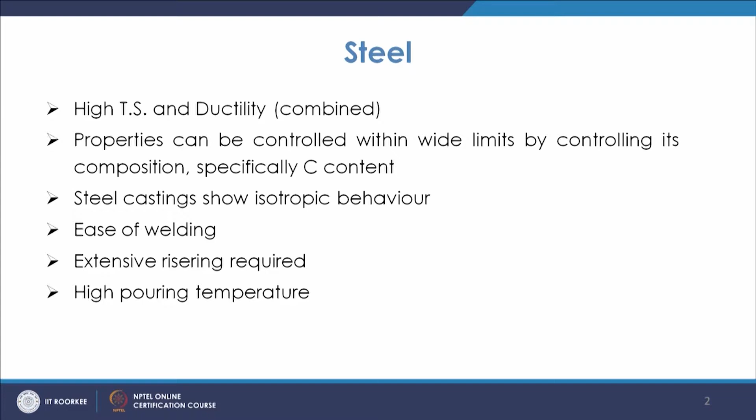Now, steel castings also show isotropic behavior, which is one of the advantages. Ease of welding: weldability is good, so it is also preferred for fabrication purposes. When you have to join two pieces, because of the ease of welding, it is preferred over many materials.

But there are certain challenges in steel casting. One is that extensive risering is required, because first of all we are going to high temperature, and also you have the freezing range involved. That freezing range necessitates the use of risering to a larger extent.

Also, whenever you have heavy sections combined with thin sections, or large chunky portions, the risering requirement has to be properly addressed, because otherwise you will have defects like hot spots or shrinkages. So, extensive risering is required in case of steel. You have to have proper understanding and control of shrinkage defects, where proper risering will address those issues.

Then we know that we have high pouring temperature in case of steel, which is also one of the challenges. For that you need a proper furnace which can give you the large pouring temperature, and the defects related to high pouring temperature need to be taken care of and properly controlled, such as gas absorption at high temperature.

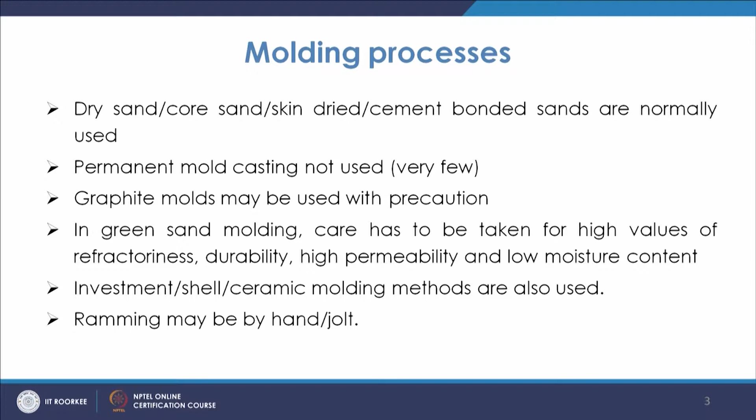Investment casting, shell casting or shell molding, then ceramic molding method, they are also used, but investment casting certainly will be limited in its size. Then ceramic molding also may be used for typical applications. Then the ramming has to be done either by hand or jolt machines. So that is normally the practice in case of steel molding.

Cores have to be of very high permeability because they are subjected to very high temperature. So we also prefer to have hollow cores in many cases, and defects may come because of the improper properties of the cores, and the defects which are likely to come are like hot tear. So suppose there is improper collapsibility of the core; in that case hot tear defects may come. We know that in hot tear you have pulling at that interface, and the lower strength of the steel at higher temperatures, and if at that time you have poor expansion property, this hot tear may crop up.

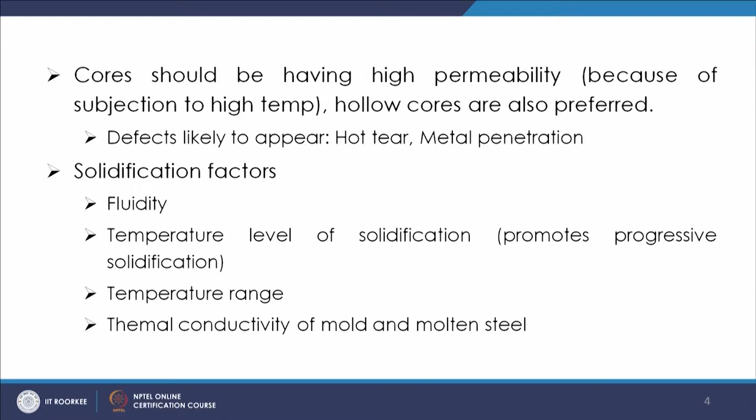Temperature level of solidification. That is also important because you need to have progressive solidification. Once we pour at a higher temperature, because of the temperature gradient, the molten metal touching the wall will start solidifying and then it will move towards the inner side. So, that will promote progressive solidification. Temperature range, as we discussed, that is the freezing range. That affects the solidification mechanism.

Thermal conductivity of mold as well as molten steel. That is also an important factor, because this basically tells us how fast the heat can be extracted, or, because of the thermal conductivity of metal, what will be the temperature gradient inside the casting. So, that affects the freezing pattern. So, this has to be taken care of.

Coming to steel melting. For steel, normally we go for open hearth, that is acidic or basic melting. Then we go for electric arc, that is acidic or basic melting. We have already seen that either we have the acidic slag or basic slag, and based on that we go for that kind of refractory lining, and that is why it is that kind of melting. Further, you have the converter process also, which is used in case of steel melting. You have the induction furnace, which is used for steel melting.

Vacuum melting is also important to be addressed, because many times, being very reactive in nature, or because of the chances of contamination of liquid metal with atmospheric oxygen or gases, it is better when we go for very important casting units, or we want to have very pure casting. In those cases vacuum melting is preferred.

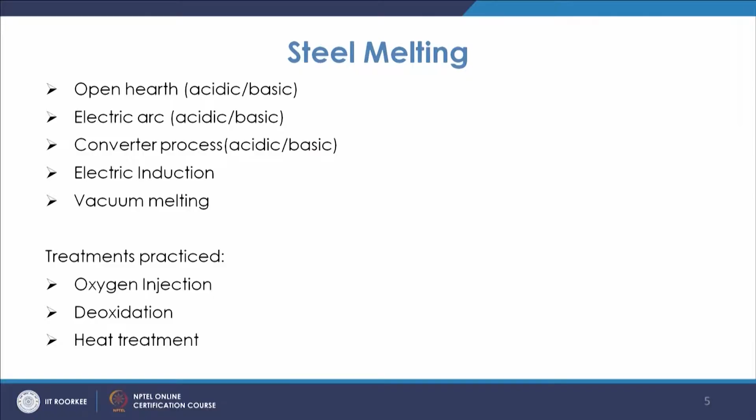So, these are the treatments which are practiced for steel melting, and then heat treatment is practiced normally to achieve the desired properties, many times to relieve the residual stresses which are developed during the cooling of the casting. So, these are the treatments which are practiced in case of steel melting.

Next, for the casting of steels, for eliminating shrinkage, the proper practice is that the casting must be fed in the heaviest section. Basically, you have the position of the riser also. That has to be normally attached to the heaviest section, so that there is no shrinkage, because the thinner sections will go on solidifying early. So, you need to provide liquid metal for shrinkage at the portions which are going to solidify towards the end, and that is normally the heavier sections.

So, the casting must be fed in the heaviest section, and from there it should go to the thinner sections, so that the heavier section is connected to the active feed channel of the gating network, so that there is less possibility of having shrinkage in those regions.

No carbonaceous materials or washes should be there, because as we know, this is a challenge in steel casting, that there should not be carbon pickup. So, that is why we have to be careful about it. Use of new facing sand, because that will provide better refractoriness, and the tendency for fusion at the surfaces will be lesser. So, that should be there. Metal must be deoxidized before pouring.

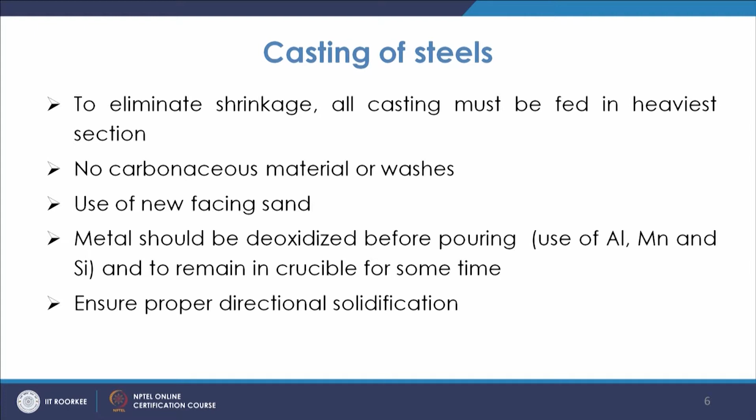So we do the deoxidizing practice, and also we should ensure that there is proper directional solidification. That has to be seen by proper gating practice, where the different sections are proportionately placed, and there is proper placement of riser and proper size of riser, so that you have proper directional solidification. There is minimum chance of shrinkage or of having a certain region isolated from the active feed channel. So that also needs to be understood.

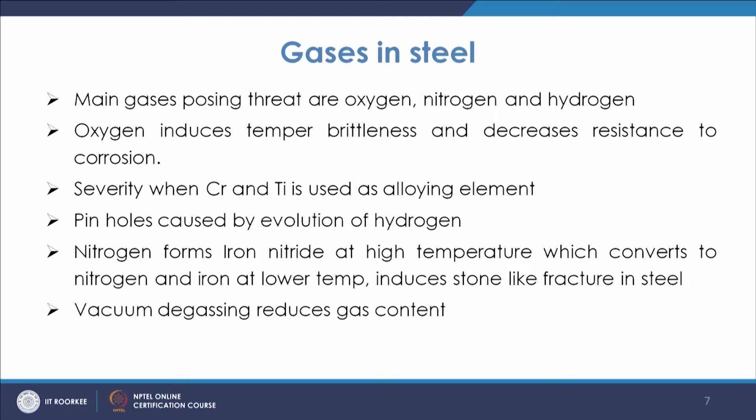The gases which normally pose a threat in steel making are oxygen, nitrogen and hydrogen. Oxygen basically induces temper brittleness and decreases resistance to corrosion, and it is severe when chromium and titanium are used as alloying elements. That is why we go for deoxidization of the melt, so that the oxygen is removed.

If hydrogen is there, then you have the chances of pinhole porosities, because towards the end when the hydrogen solubility becomes too low, it tries to come out in the form of pinholes. So pinhole porosity chances are more if the hydrogen is more. That is why you have to see that hydrogen is properly controlled.

Similarly, nitrogen will form nitrides. That will induce the stone like fracture, that will induce brittleness. So nitrogen also is undesirable and you need to reduce it. Vacuum degassing is also one of the ways to reduce these gas contents.

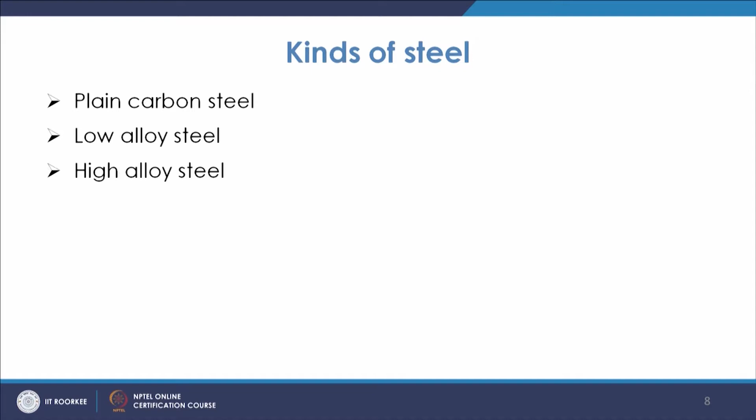As we know, we have different kinds of steel, plain carbon steel, low alloy steel and high alloy steel, and you have different suitable methods for melting such steels depending upon their use. You have to see how you are going to supply the alloying elements so there will be minimum losses, and depending upon the kind of steel you are melting, you need different kinds of alloying elements.

In steel itself you may have austenitic steel, ferritic steel, martensitic steel, depending upon the composition of the alloying elements, and they have typical uses. So that needs to be seen, what kind of steel you are going to melt and prepare, and accordingly you can go for proper selection of process parameters.

Now, we will discuss the melting practices for non-ferrous metals and alloys. Non-ferrous metals and alloys are very much used in foundries, because many components are made of non-ferrous materials owing to their light weight, ease in casting, and better machining, and many non-ferrous materials have high strength to weight ratio and are easy in handling. It is immaterial to discuss their uses at this stage, but we know that they are all around us, and non-ferrous based foundries are very much there for the production of non-ferrous components.

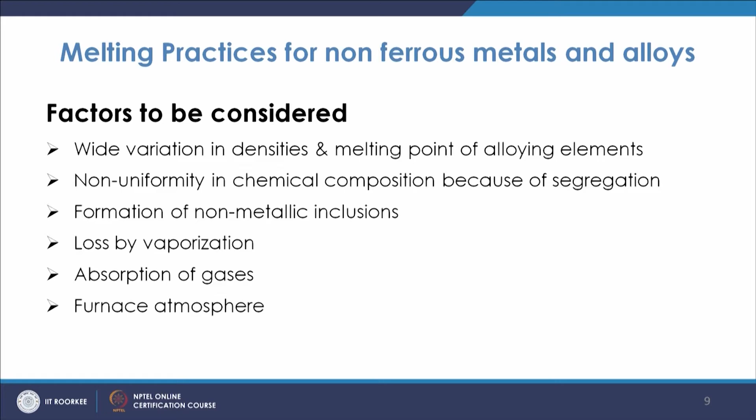Similarly, formation of non-metallic inclusions is there. Many a times because of reactions, because of their affinity with gases, or because of improper working or melting conditions, there will be formation of non-metallic inclusions. If these inclusions come to the top, they are easily skimmed or taken out, that is fine, but if they are entrapped in the casting, they are the source of defects. So, this is also a challenge, and for that you have to have proper gating practice to remove these inclusions, and proper melting practice so that these inclusions are not formed.

Another challenge for the melting practice of non-ferrous materials is the loss by vaporization, because these materials are very costly, and if you use an improper melting procedure or improper gating or pouring procedure, during the melting itself there may be loss of these precious elements by vaporization. So, many a times they vaporize and there will be loss of the key alloying elements. That may lead to an improper combination of mechanical properties.

Absorption of gases is another challenge, because there are materials which are very much prone to the absorption of gases. They have affinity towards gas pickup at that temperature. So, that also needs to be seen. You will have to have proper furnace atmosphere many a times. In most cases you have to control the furnace atmosphere, so that there is minimum absorption of gases and minimum reaction taking place with the outside world.

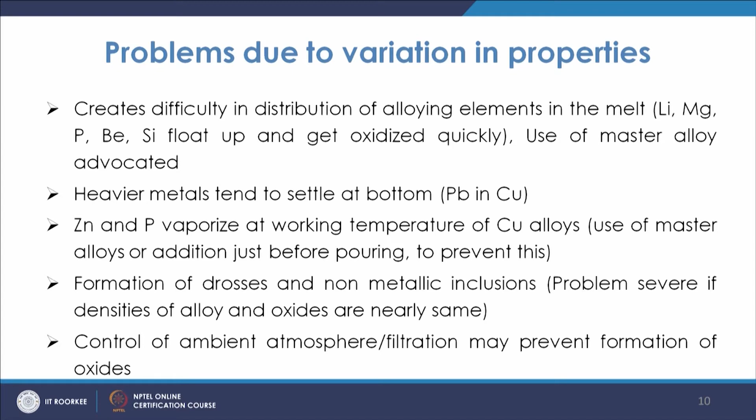Then you have formation of drosses and non-metallic inclusions, as we discussed, because certain metals are very drossy and make oxides, and control of ambient atmosphere and filtration may be done to prevent the formation of oxides in many cases. There may also be defects because of the pouring and solidification processes.

If there is improper gating practice, you may have the aspiration effect. So, there will be sucking of atmospheric gases from the outside through the sprue or in the runner, and that may lead to the formation of oxides or to wastage of the material. You may have shrinkage defect because of improper size or position of the riser.

You may have surface defect because of the reaction between molten metal and the ingredients of molding sand. That will lead to improper appearance or improper surface, which basically gives you a glassy surface, and sometimes while machining, if you have oxides entrapped, that leads to the formation of rough surfaces. So, that spoils the casting.

Then you have the coarse grained structure also. Large freezing range alloys are usually susceptible to formation of coarse grained structure. In that case, during the solidification itself, you will have the growth of the grains in such a manner that you have large grain structures.

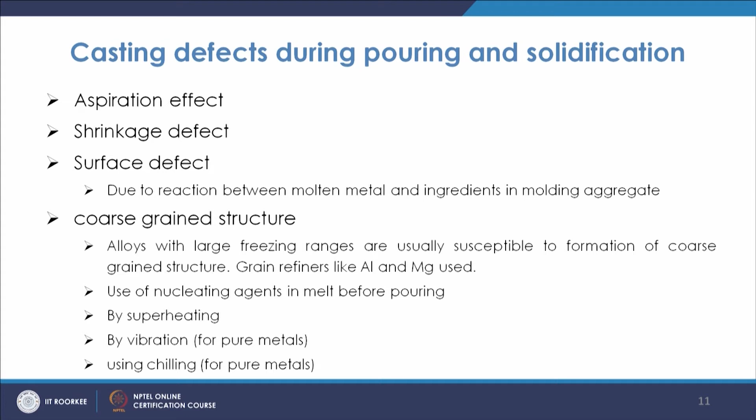Many a times you use nucleating agents in the melt before pouring. In the case of non-ferrous material, this is very common practice: we use alloying elements, and many of the alloying elements' main purpose is to act as the nucleating agent, to make the grains finer. Because of superheating also, you have the chances of coarse grain structures.

You have many methods, like the use of vibration, or using chilling. These are the methods practiced to avoid that.

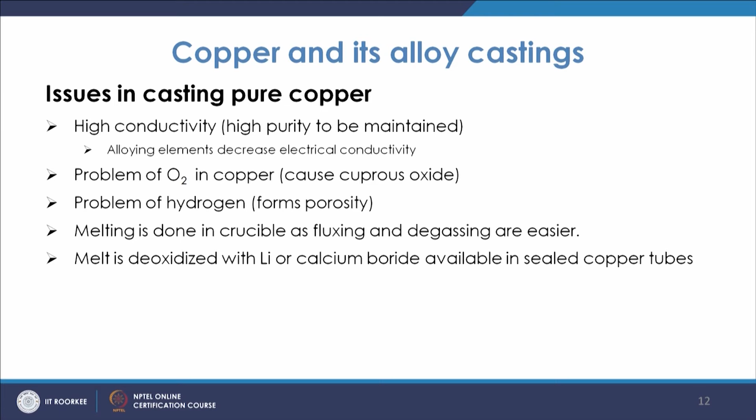Now, coming to particular materials like copper. In copper, basically the challenge is the higher conductivity, because the temperature gradient is not maintained, since the conductivity of the metal itself is very high. When you make an alloy of copper with some other material, the main aim of having high conductivity is sometimes compromised.

Then you have the problem of O2 in copper, like cuprous oxide formation, that needs to be minimized, because that will alter the property of the alloy, typically conductivity and others. Then hydrogen, if it is there, will form porosity.

In case of copper, the melting is done in a crucible, and fluxing and degassing become easier in crucible melting. Also, it is sometimes deoxidized with lithium or calcium boride, so that proper deoxidation takes place.

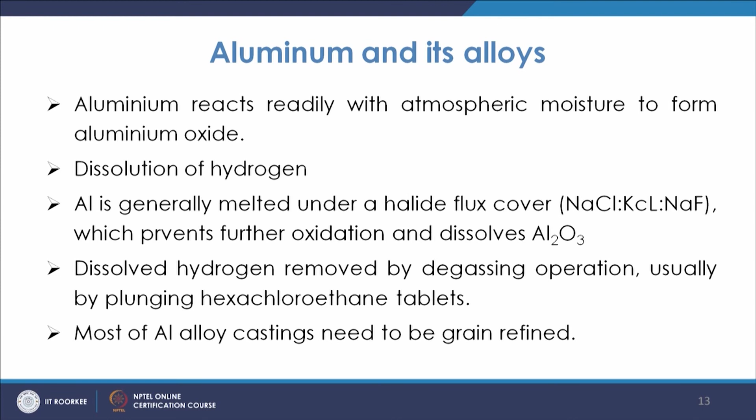Similarly, for aluminum, the challenge is that it will react with atmospheric moisture to form aluminum oxide, which is undesirable, so we need to see how we can prevent that. The dissolution of hydrogen is another challenge. For that, normally aluminum is melted under a halide flux cover, NaCl:KCl:NaF, which will prevent further oxidation and the dissolution of Al2O3. That is important in the case of aluminum.

Dissolved hydrogen is also removed by the degassing operation. Normally we put tablets of hexachloroethane, which remove the dissolved hydrogen. And we also do grain refinement; in most aluminum alloy castings, we use a proper grain refiner.

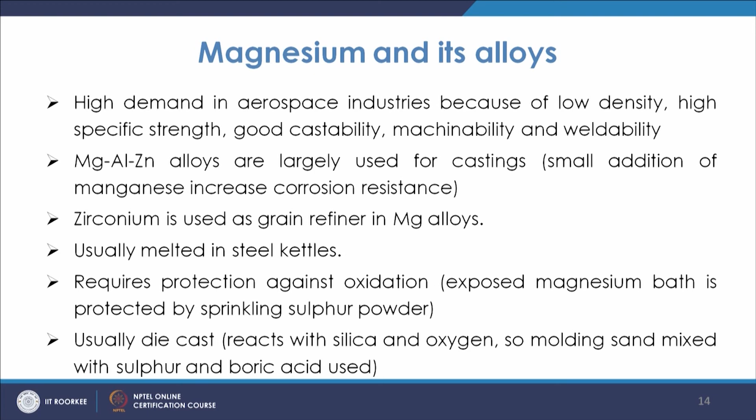Similarly, for magnesium and its alloys, magnesium is a very reactive material, very drossy, so you have to have a proper melting procedure. They are used in many areas because of their high castability, machinability and weldability, and good specific strength.

Zirconium is used as the grain refiner in magnesium alloys, and normally you melt in steel kettles, which requires protection against oxidation as we discussed earlier. It will normally be die cast because it will react with silica and oxygen. That is why many a times you mix sulfur and boric acid with the molding sand to prevent that, but normally it is a die cast material. So, this is magnesium and its alloys.

So, this is about the production of non-ferrous materials and alloys. There are other non-ferrous materials and alloys, melting practices and production that you can refer to and get your knowledge enriched. Thank you very much.